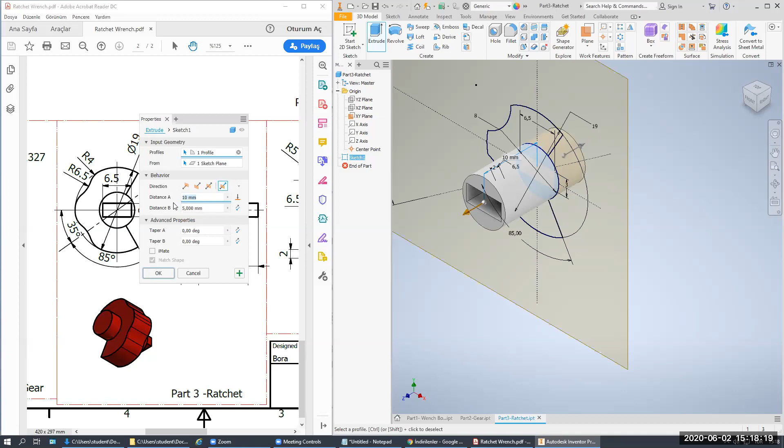I have the extrude tool. I will use this section to go inside or outside, or with an asymmetrical view here. Here we have 11.2 millimeters. This time I will use this section, as you see here. Also, I would like to keep the inside, I have this one because I need that section as well.

Also, for the other side, we have a 4 millimeter thickness, which is this one. I have the first figure. To use this one, I will just make it visible. I have the extrude tool this time. I will use this extrusion to be 7.2 millimeters in thickness. As you see, we have 4 millimeter left for the 4 millimeter portion of this part on the other side.

For this one, I need a sectional rectangular section on the top side. For this, I need to start a new sketch.

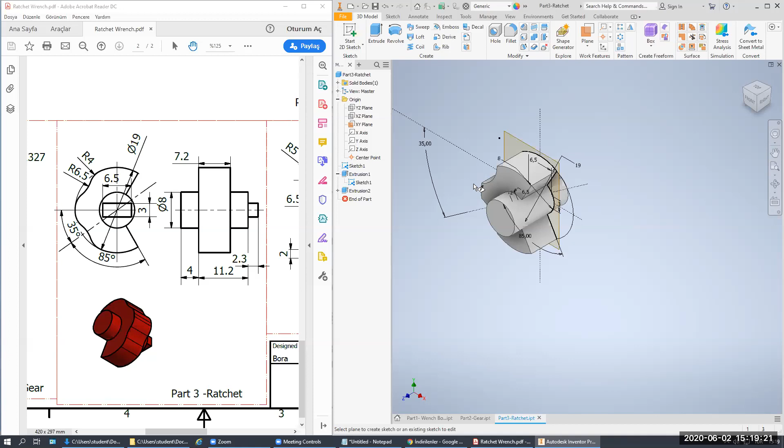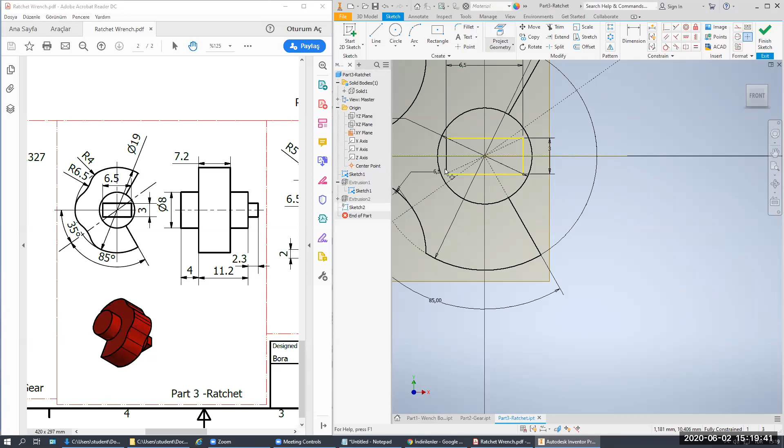This time I will just hide my body part and grab the geometry with the project geometry tool, which is seen here. Okay, I have forgotten one line. You can also use that line by connecting the line portion of that side.

I will use the visibility tool, have the extrusion tool. This time I have a 2.3 millimeter thickness on the top side.

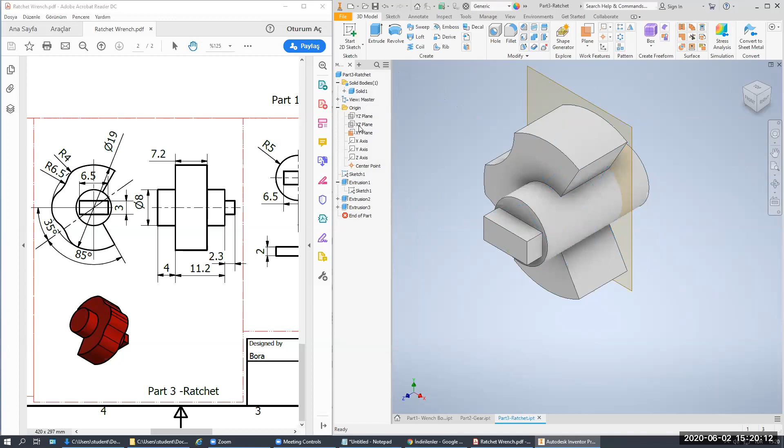Okay, what I need is here. I will just hide the shape sketched, and I would like to have visibility, the same ratchet part as usual.

The next portion we have the standard millimetric part. For this cover part, I'm going to just design, say the part 5 lever.

This is a very easy part. Creating a sketch on the XY plane. For this, I need sometimes a little axis line. We have two curves here.

One bigger curve, one smaller curve, and these curves, the arc shapes, are connected with two lines. So here I will just make an arc shape and trim the unnecessary parts.

For this one, I need a new rectangle to inside. I will just give the dimension as I have seen in the technical drawing.

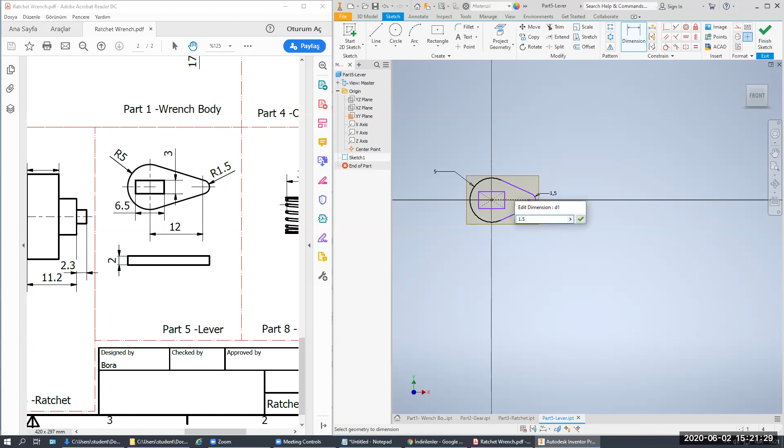We have 1.5 to this side. We have the axis distance, which is 12. We have the rectangle dimensions, which is 6.5. It is 6.5, with a 3 millimeter thickness.

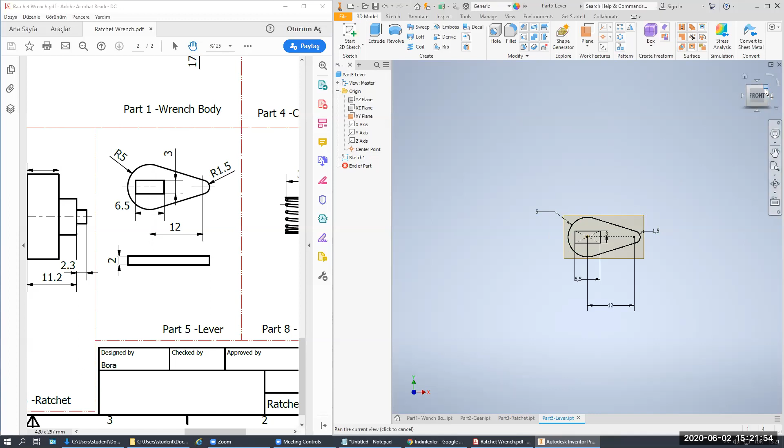Okay, finished my sketch. I have a 2 millimeter thickness sideways. For here, I will just change my view. You can just keep it as the mid plane if you want. For this, you have to use the symmetrical extrusion tool. I will change the distance, let's say, and make it again.

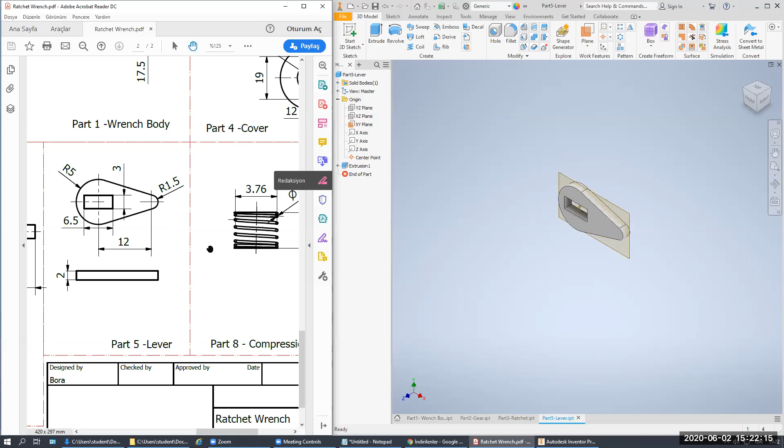The next part we have is the cover part. Again, it's on the XY plane. I will use visibility, it's the XY plane again, the same thing.

This time I will just create an axis line and choose this point, the point which is at this center origin point, which I have seen here. I'll create a base, a new line.

I will just convert these two lines to construction, make this line pass through the origin point, and make a new point coincident with the origin point.

We have a line for holes. Also make this line midpoint coincident to this line. This is also a construction line.

We have a thickness here, which is 19, and we have a distance of 12. As you see, we also have two circles connected with two lines.

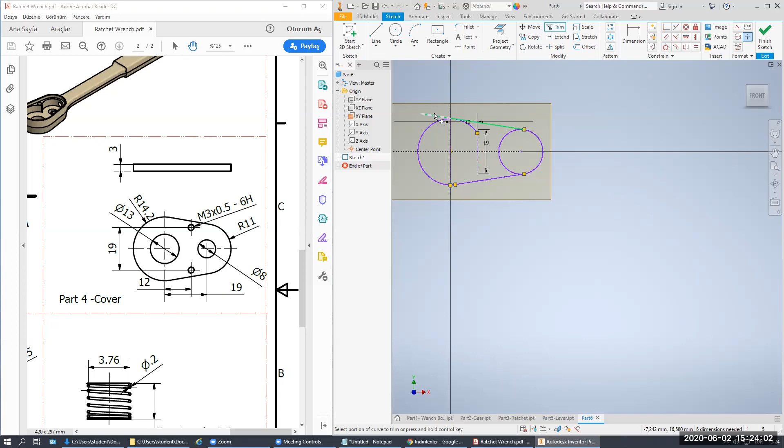I will use two line tools, and I will make the two tangents between these two circles, make the trims, and fill up unwanted parts. I will just make the trims as much as I can. Okay, here we go.

Here, three circles to see. If you want, you can also use the circles for purposes. We have 18, I'm sorry. I haven't fixed this line, so that's more like that. We have again the line between these two points, it is 19 also.

This point, this line, which is 19, and we have a dimension for 8 millimeter, which you have seen here. We have another point which is 14 here. We have a dimension with a radius 14.2 here. We have a dimension here which is 11.

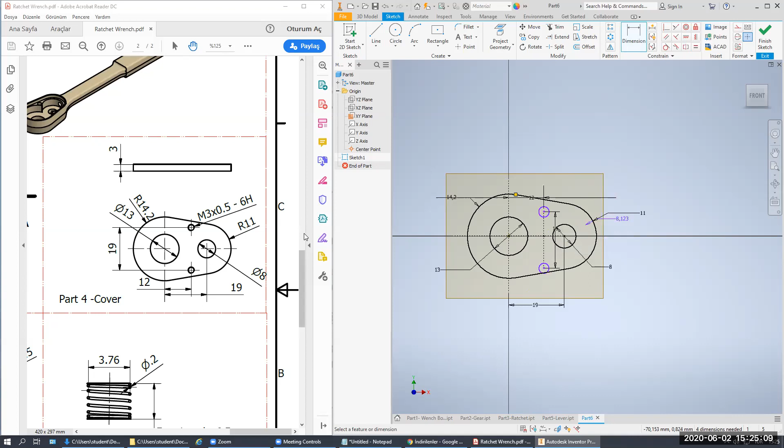As you see, dimension here we have 19, and this is moving actually. To prevent this one, we have a line with 19 millimeter and make this line midpoint coincident of this line.

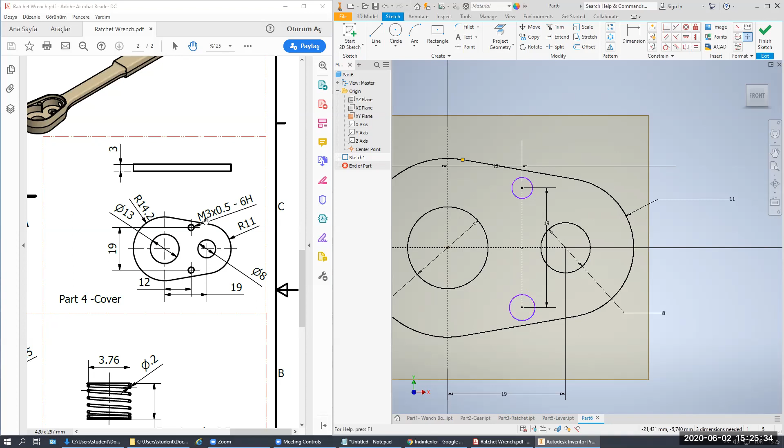To prevent this dimension, I'm not going to use these holes because I will use a hole tool with a full thread feature. I will just finish my sketch. I have a 3 millimeter in thickness.

I will also use these two circles because I will just make these circles with a hole tool. Fill it with 3 millimeters. You can just use this time to have the hole feature, to see this tools, to see the sketch points for making the hole purposes.

I will just make my extrusion to one direction and the inside of our XY plane till to the back side, or the back, not the front side, to the back side of our part here from this view.

Here, what I'm going to do is I will just create two holes on these two points, and this will be a threaded hole with a normal, without a counterbore, spot face or countersink options. I will use my metric profile because we have a metric tool here, and our metric size thread is 3 millimeters with a through all distance, so properties, with a full depth property for the threaded section.

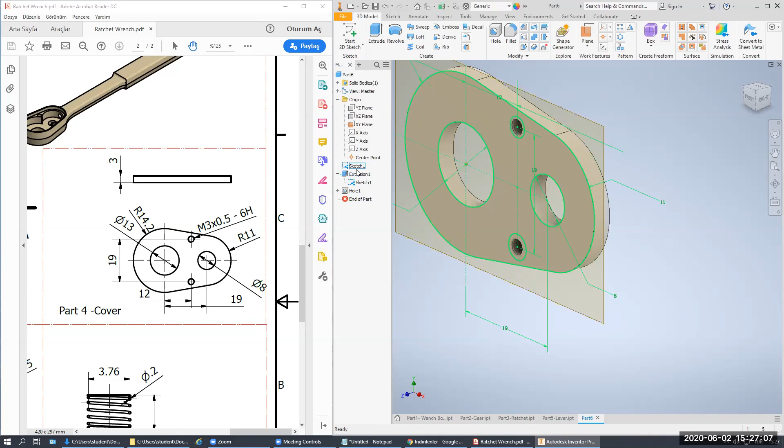As you see, I will just close the visibilities of our figure. I will just save my part file, which is 4 with a cover.

Next thing, we have a compression spring. So, a new standard part. The drawing length, it is given as 3.2 millimeters. The free length is 6.5 millimeters, which tells you that we are going to just model the drawing of our part with a free length.

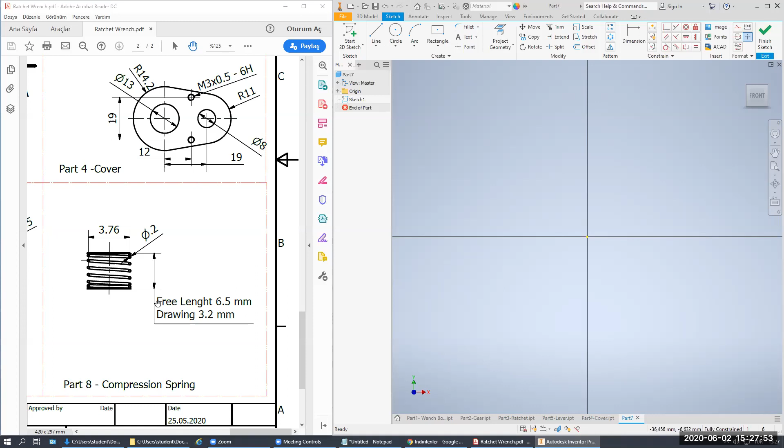In the drawing, we are going to make a 3.2 millimeters. We have a coil sizes, and I will just make the counts of these coils: 1, 2, 3, 4, 5, 6, and 2 half on each side. I will just make a spring here, the wire diameter.

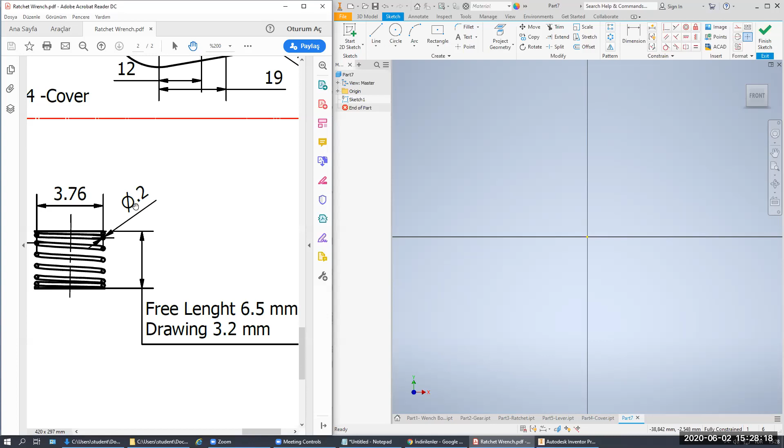The wire diameter is 0.2 millimeters, and the axis line is here. I will start from this point, the free length. This is my origin point, and I will just like to keep the center line.

Properties this line. We have a coil profile, which is this one. It is... sorry, I will just enter 3.76 millimeters, I'm going to use.

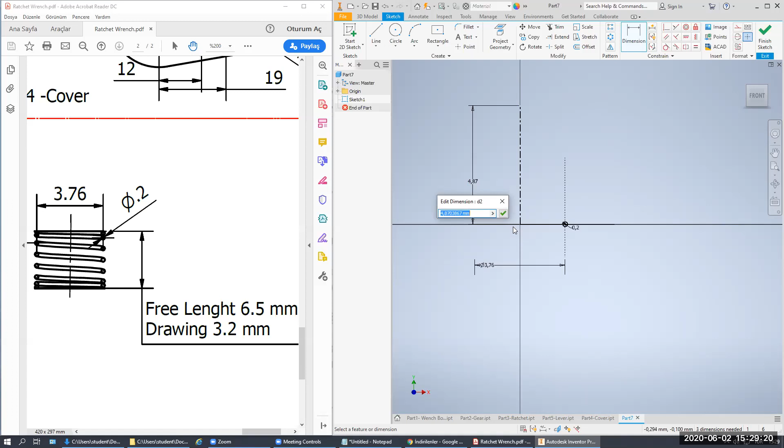This is my construction line. I will use this intersection point, which is my wire diameter, is 0.2 millimeters. I have many coils so far. I have just counted with 7 coils, and the free length, the dimensional length of here is 3.2 millimeters. Here, finish my sketch.

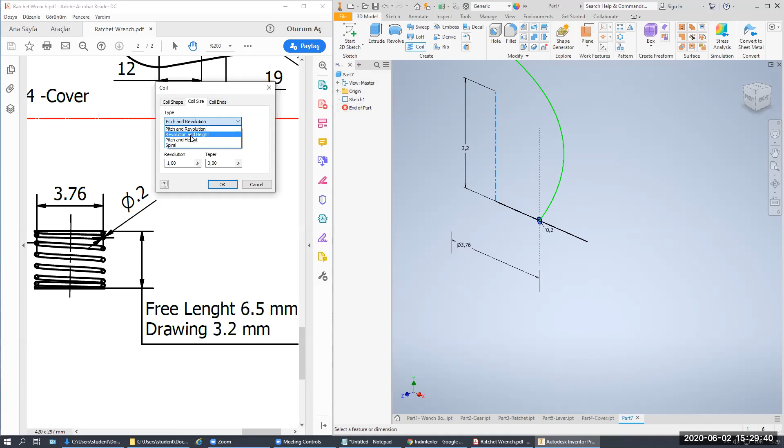If you want, you can also just use the coil tool as you wish. You can just use this axis. We have a profile, the coil size. We have many options here. The revolve, you can have 7 or 6.

I will just use the plane tools. I will just create another plane from this point, which is 3.2 millimeters, and I will make the split.

This time I will split, trim the solid by using this split tool. I will use this tool to keep this side. I'm sorry, just use edit feature, change the removal side.

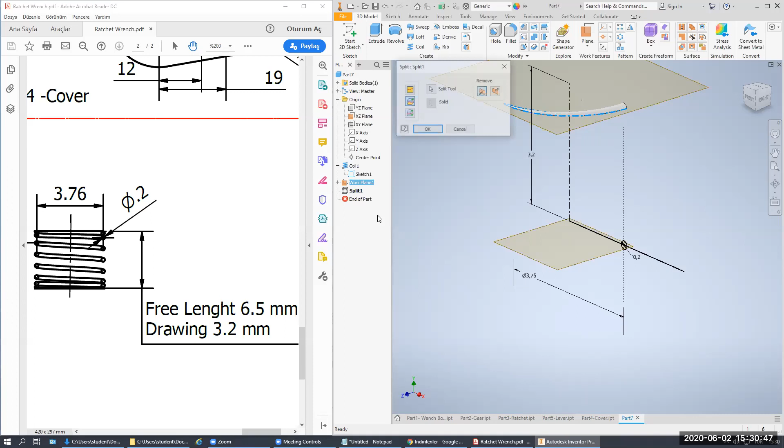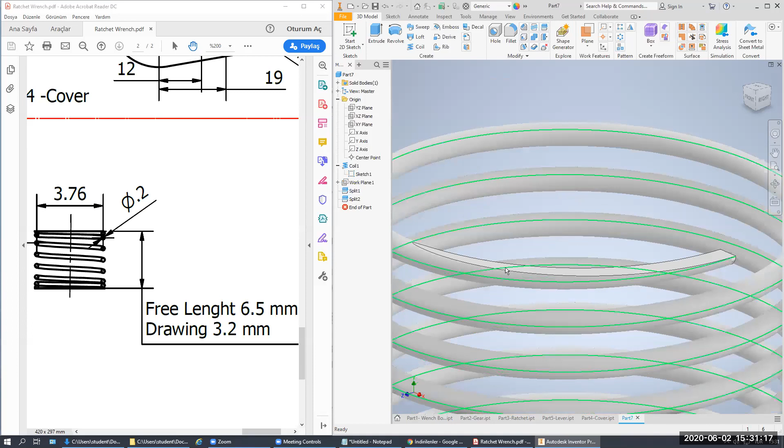I will just create and hide the visibilities of our plane. First thing, in the future, I will need some flat surfaces for mounting purposes, and also I need an axis made the mating condition of our axis.

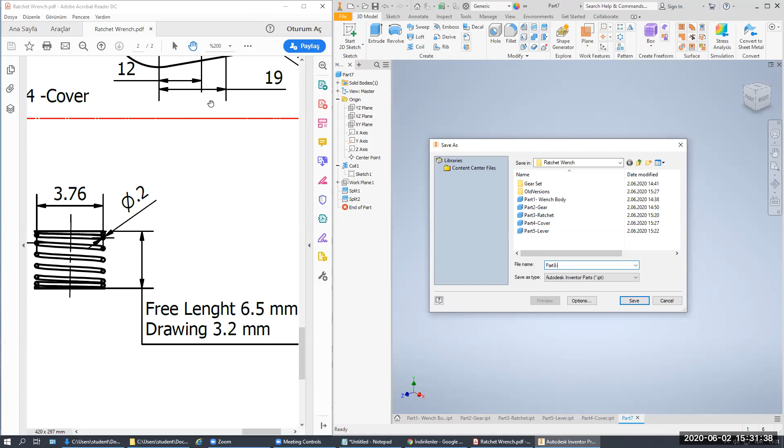For this reason, I will just open the y-axis only for mating purposes. I will just save my part with 7, 8, I'm sorry. This is my 8-part compression spring.

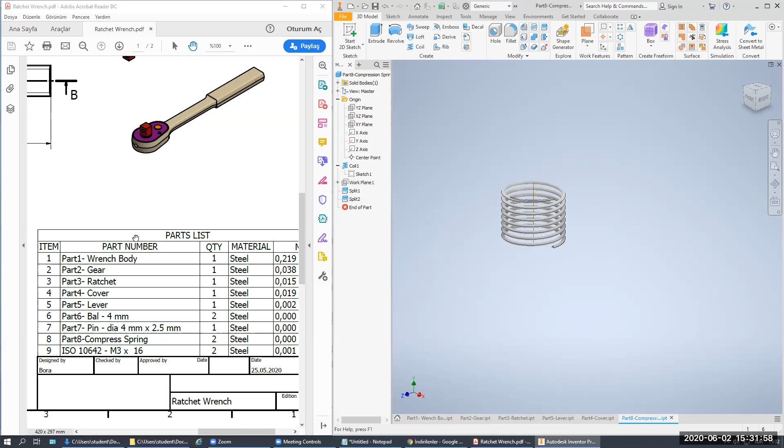I need two more parts that I previously mentioned: the ball and the pin diameters. The ball is part 6. I will just create a new part file and change the name of our part 6.

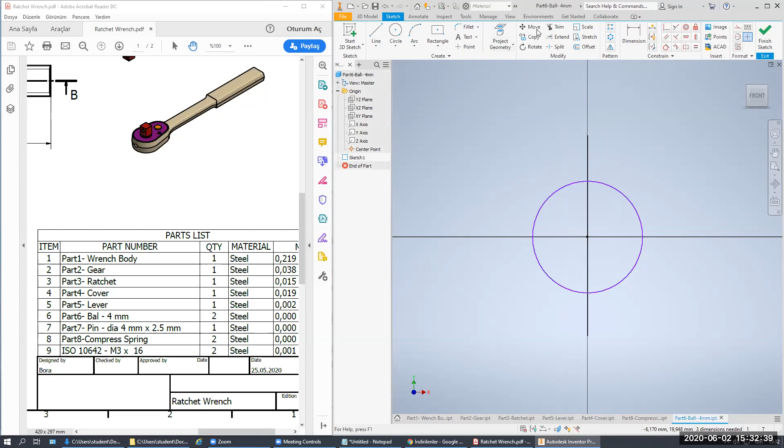This will be the ball, 4 millimeter diameter. For this, I will just use the visibility settings in the sketch on this plane. I will create a new circle, make a line which will pass through the origin point, trim it, and dimension the diameter at 4 millimeters.

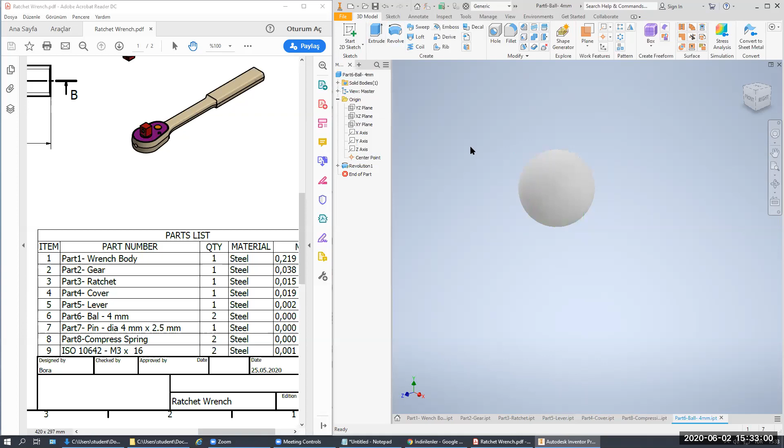I will use this cross profile to be revolved around this axis, getting a ball at this point. Save, and change the material to steel.

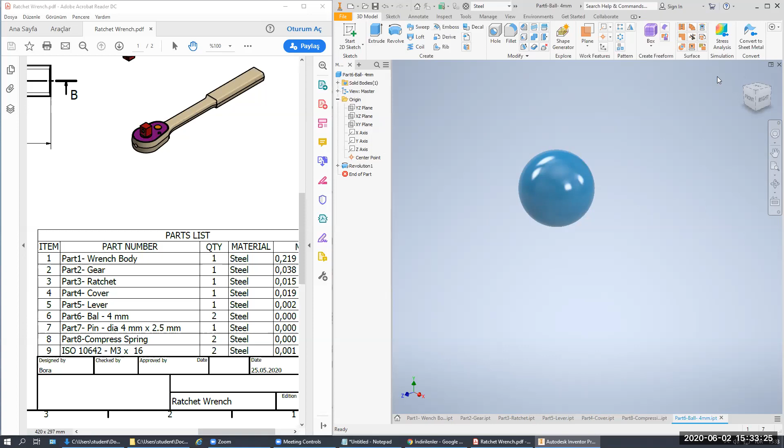You can use the tool for appearance, any color if you want. So what I need next, I will save this part file.

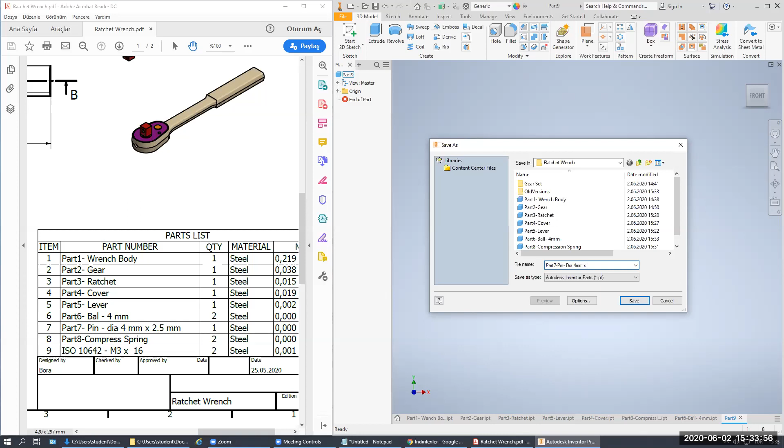The next part we have is a pin, and we are going to make the assembly in the second section. This is part 8 - I'm sorry, part 7, the pin, with diameter 4 millimeter by 2.5 millimeter.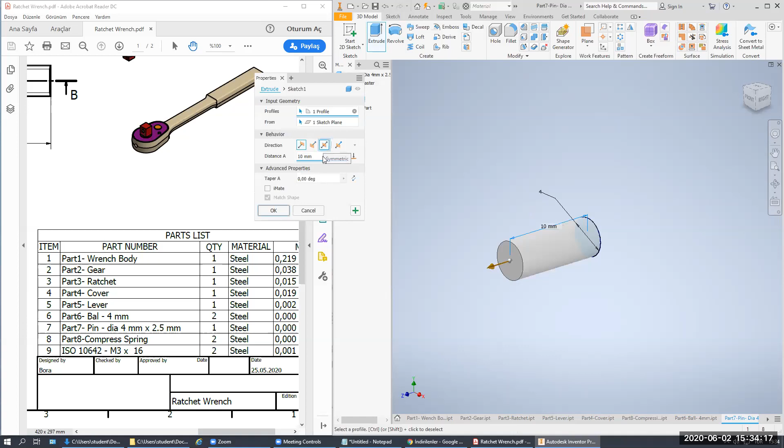I will use the sketch tool. This is a very easy part, so I'm not going to work on the axis properties or other things. What I need is 4 millimeter diameter here, extruded, keeping the XY plane for symmetry purposes.

The dimension here is 2.5, which I may need for sectional purposes. This is also a steel part, so I will change the name and the material to steel.

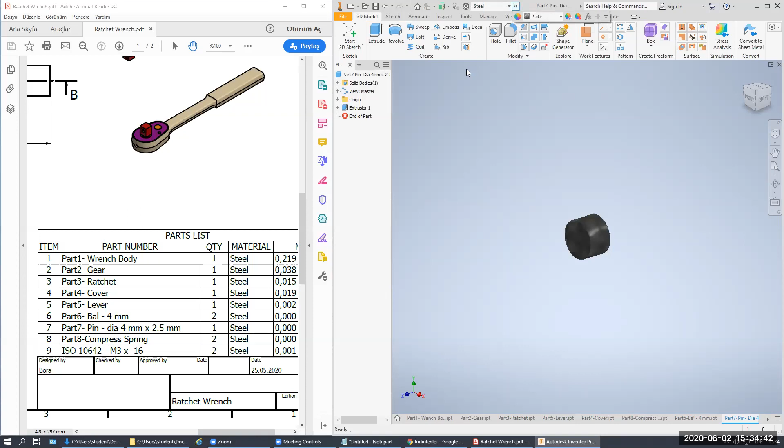We can also change the appearance. From the appearance tool, we just set the properties. I have saved and completed all the files.

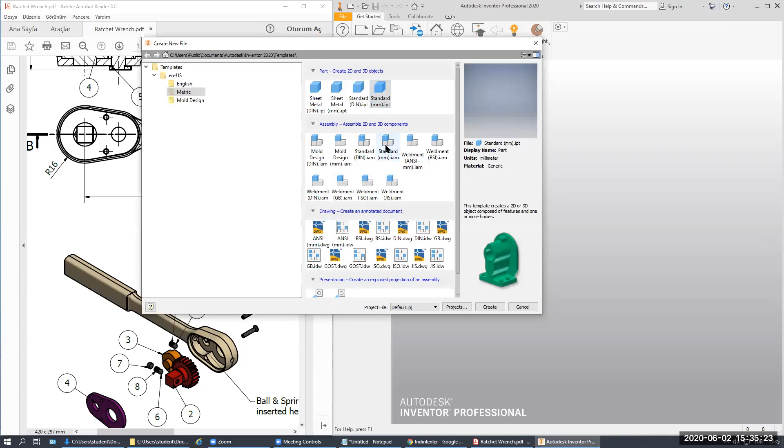We can now move to the assembly mounting. It's a very easy assembly, but for the pin, ball, and spring constraint mountings, we will make the groups one by one. I will open a standard millimetric assembly file and save it as ratchet wrench.

From the place menu, I will bring in all the parts that I have created so far. The first part I bring is the body part, and I will make it grounded. This is very important, otherwise you can just change the part visibilities.

I will use the view tool with shaded with edges to see the sharp edges of the connections. For the appearance tool, I will close the origin's extra visibilities. Then I'll save all the files here.

I will change the appearance to, let's say, magenta - I'm sorry, cyan. Yes, this is the appearance for cyan.

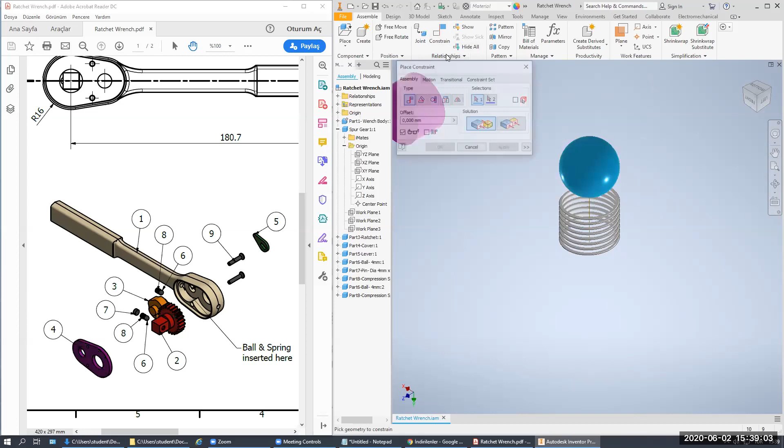You can also create a tangent condition to this part, to inside or outside. You will just see that as it is, so it is tangent to it. You can also just copy this one as well for the other side.

Okay, I will ignore this one and just mount it on the gear set. You can also use this. I will use the constraint tool, have this axis to inside, and take it out from this part.

Here, what I'm going to do is I will use this axis for mounting this time. As you see, we have it out here. Okay, next thing, what we have here is I will just keep it grounded for mounting purposes only.

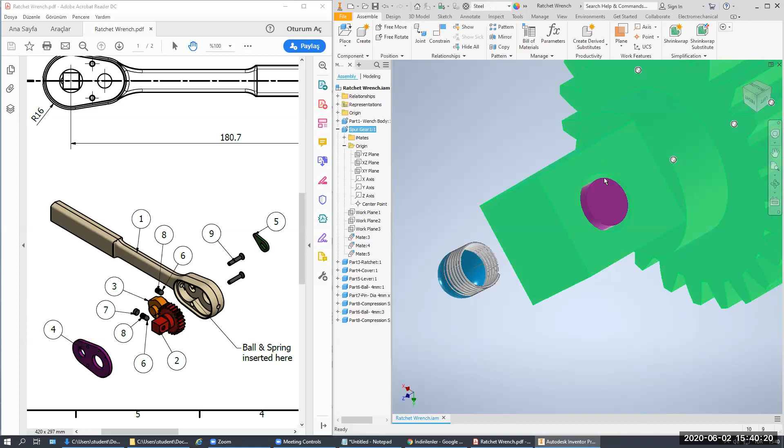I will use this part, also this pin, to this side. Okay, next thing, mounting. This is the part for here.

I think I have a mistake. And I will use this one.

For this, I will use the angle tool again. For this purpose, I will use the angle, surface, this edge. Just this one.

Also, we have some dimensional tools on the other side, so we can just create one. I will just define the XZ plane.

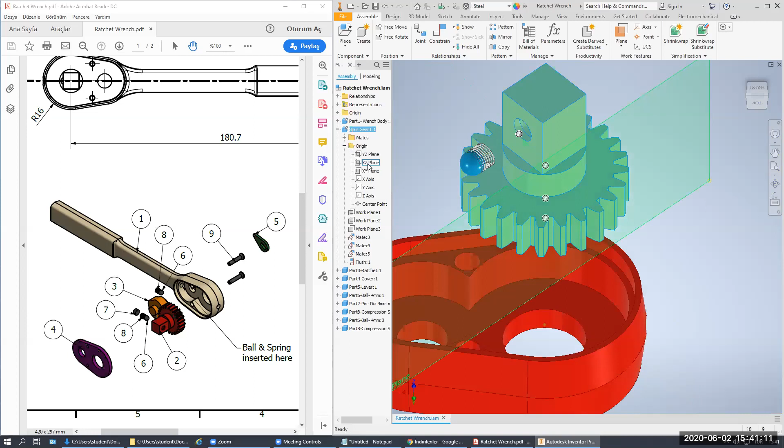Scroll here, plane, which is basically this one. This one actually is better to use for a half section view. As you see, we have the half section view.

I will just make a mount on the back side of our feature. I will just make a constraint to this one. I will change the dimension tool here.

This is 5mm because I'm just going to change those. Open the part. First of all, I'm going to change the diameter, then the dimension. Finally, I'm sorry, first I'm going to change the dimension.

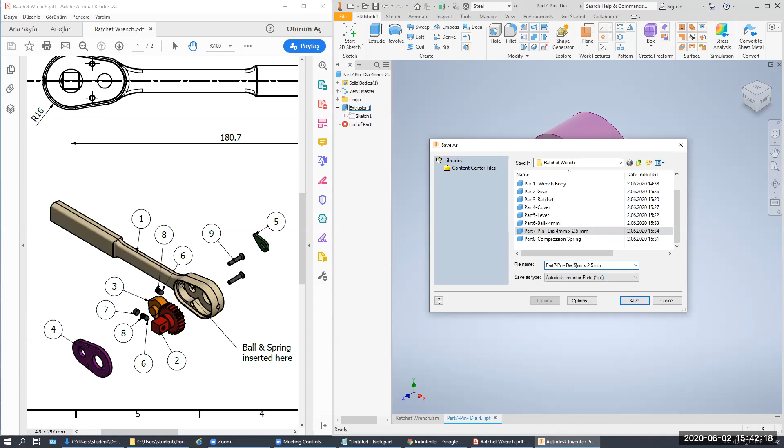Then the file name, save as pin dia. This time it is not 4, it is 5 to 2.5. I will change this one. Also, this one I will just close.

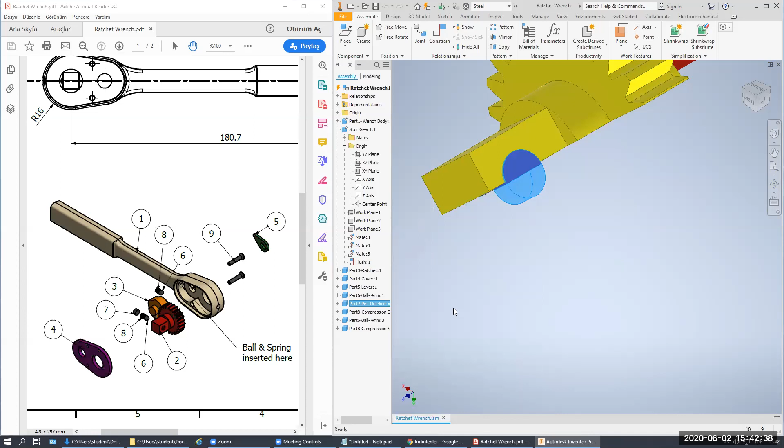Yes, as you see, it is changing, but I will just replace this component on the folder which I'm working in. I will change the font to a different one.

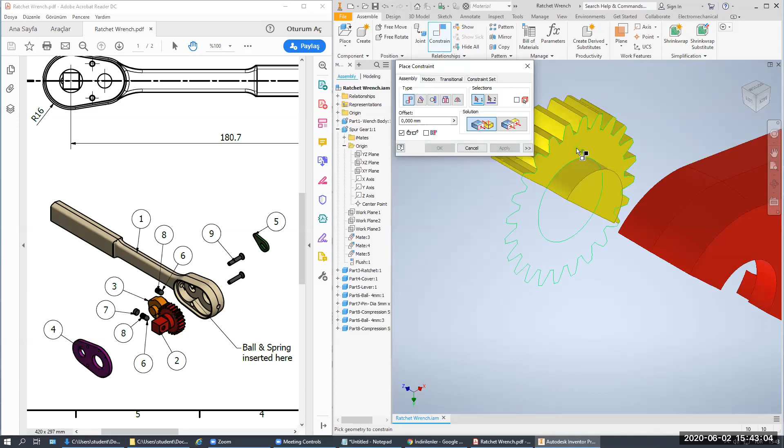I just made a mistake. And in the usual style, I will just keep the bottom face of this gear sit on this body part. I will make a constraint, use this face for mounting on the other face around.

And I will just type the key. Yes, actually I have grounded it for mounting purposes. For this, again, made the against condition, the mate condition. I'll just keep this one.

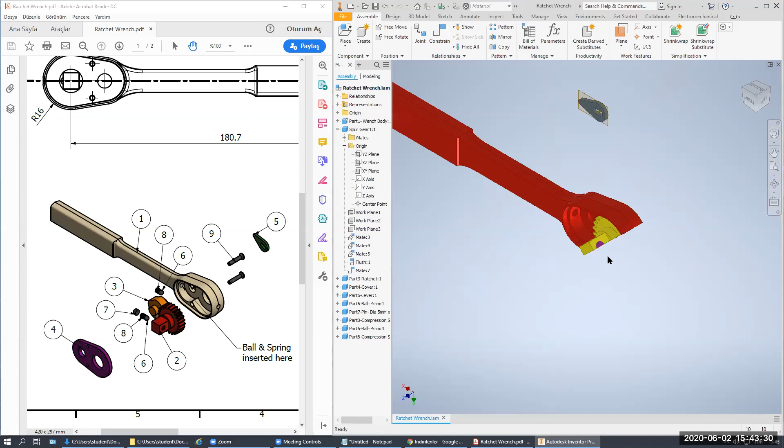As you see here, they have been turned together with all the parts here. Just the next part, we have a ratchet part. I have a constraint this axis to this axis, as you see here, and I will make this part on this side.

So the other side as well. Start the ball and the spring condition just works on this side.

I will just make a sectional cut up to this point. As you see, I will just make a half section cut here, a little bit inside, at this point here, to show you better.

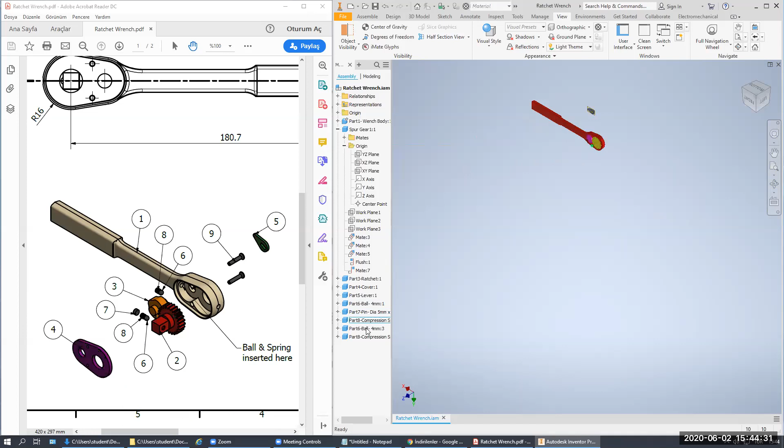I'm sorry, I made a mistake. In section, first of all, I will just create an axis made with the...

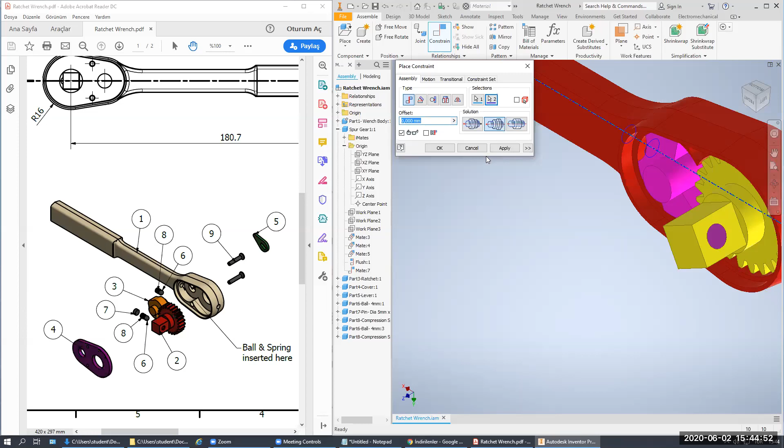Let's use this time again, the view with our section here inside. See what I'm doing here.

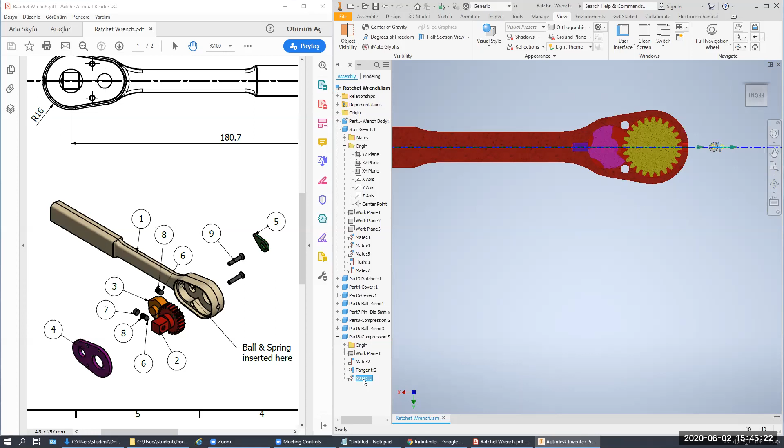You see, the spring is on the other part, the ball part is on this point. The direction is different. I have just used this compression spring made here, as you see. This time I will edit this one.

This is the align, this is the opposed. I will change this dimension to this side. Here, what I need is, if this is the open one, we have a spring loader, and this time when I use it...

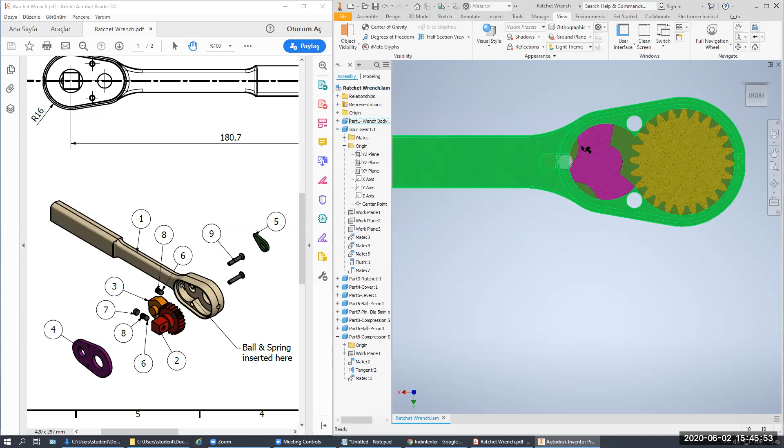This time, when the spring loaded just stops this one, it stops the ratchet down. When we have pushed one around, it will just push this spring and the ball inside.

We have a locking block about this one. We have the lever inside on the back side of our wrench body, and this is spring loaded.

What I need is I will just make this one tangent, deleted, and take it out here. As you see, we have just made the spring at this point, at this point.

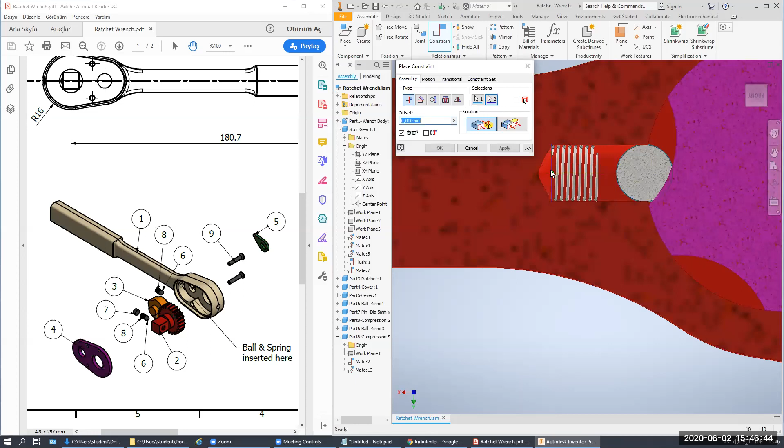Yes, we can change this one, this stuff. So we have a tangent condition, which is this one.

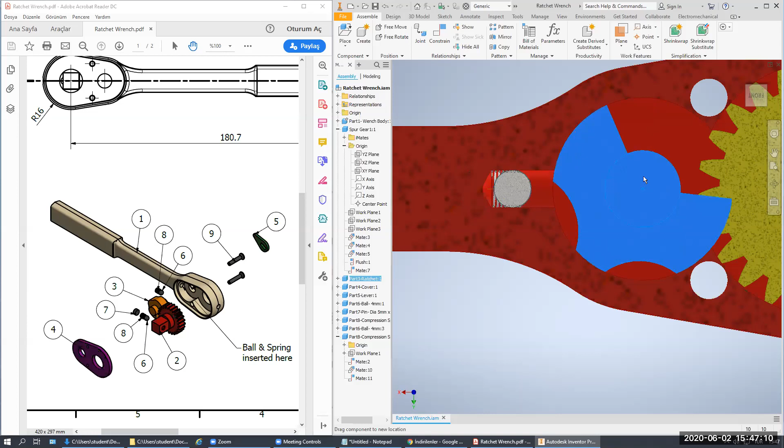Just make it constraint, touch the face with the angle condition. This face is to be angle with this face.

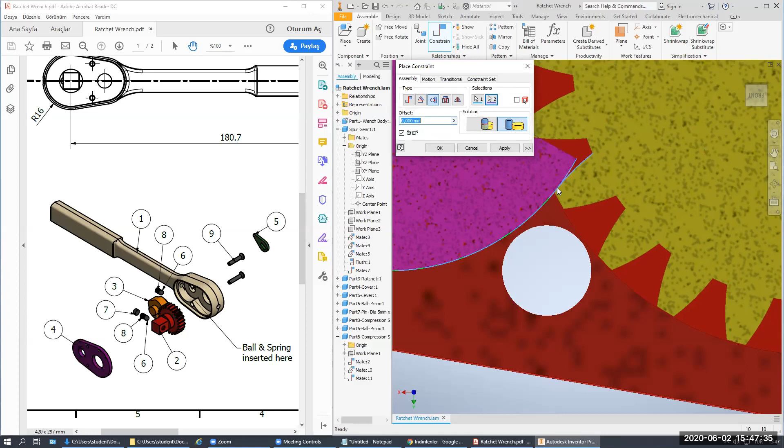Next thing, we have a ratchet on the other side. I have the whole section with a half section view. I will just cover, put the cover on the back side.

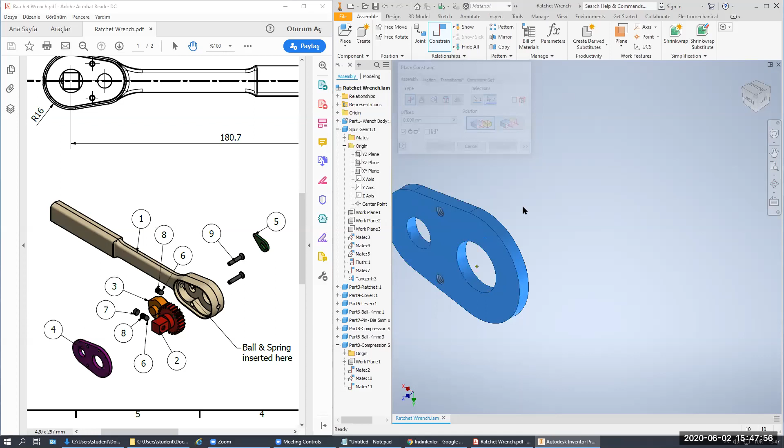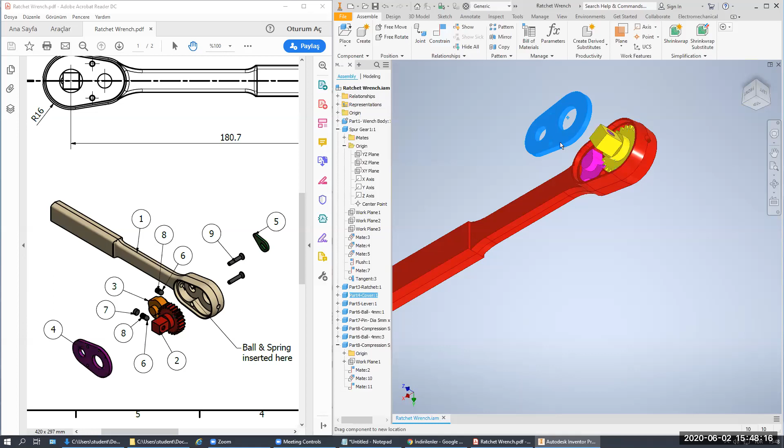I have a seat at this point on this face together. Here, what I have is this one. Again, this face is on the back side of our face here, as you see.

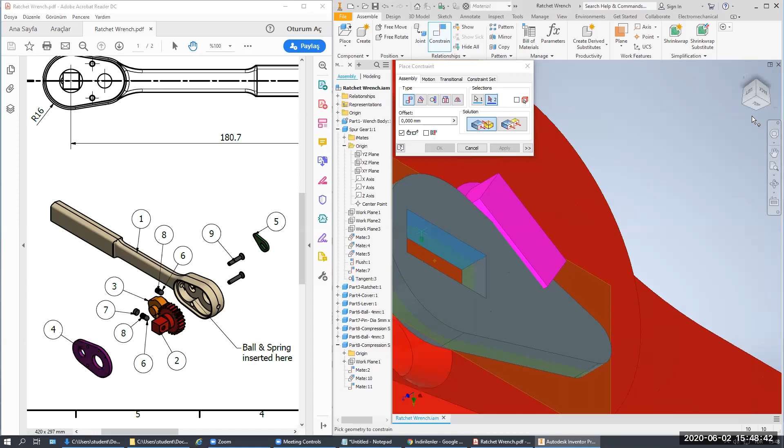I will just make the back side of our part from this face to the back side of our face. What I do is I just make this one here. Yes, this is the part that I have modeled so far.

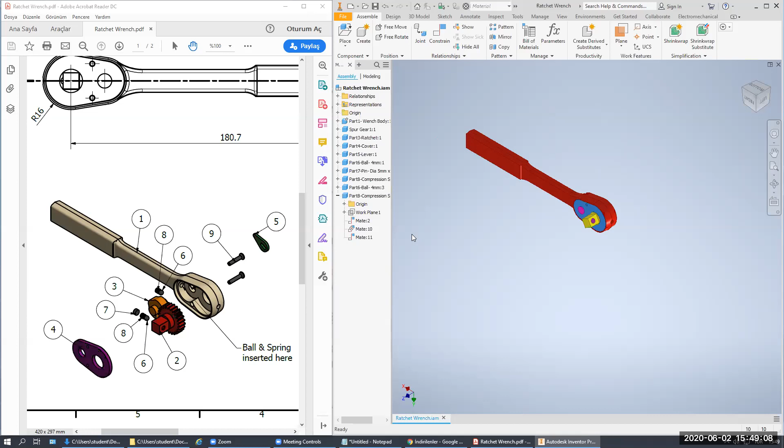Let's save it. Now I can use my parts. In line part, I will use the library to Place from Content Center we have two parts. And from the fastener feature, you can also use the search tool with the standard number.

I'm just going to search 10,642. I'll use this tool, 10,642. This is the part number. You can use both of them.

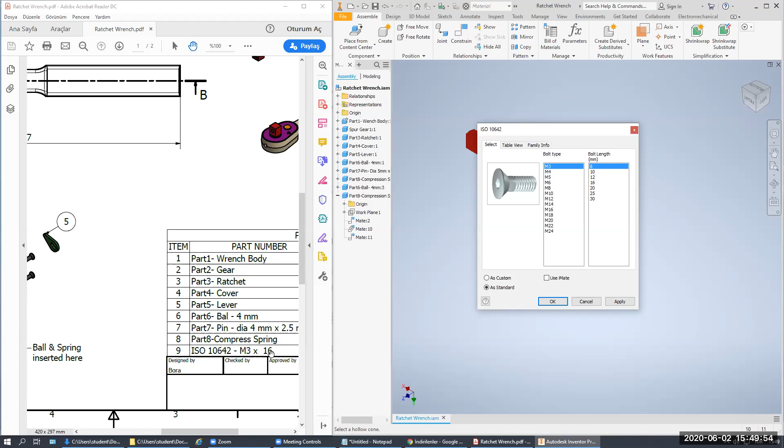I will use this one and change the size to metric 3 millimeter and with a 16 millimeter in length. I will use two of it and make mount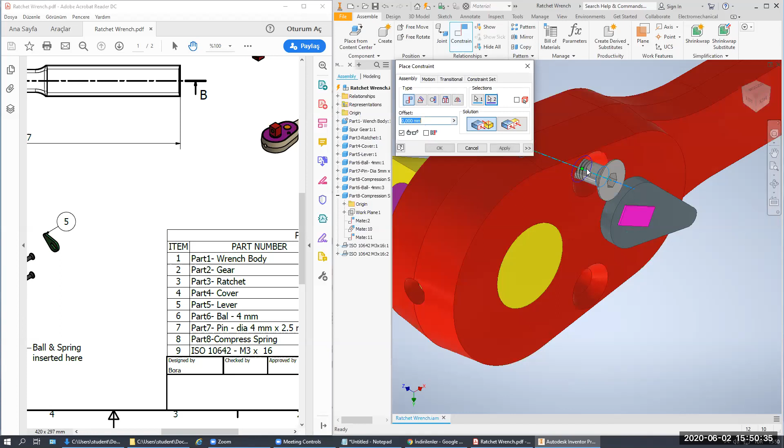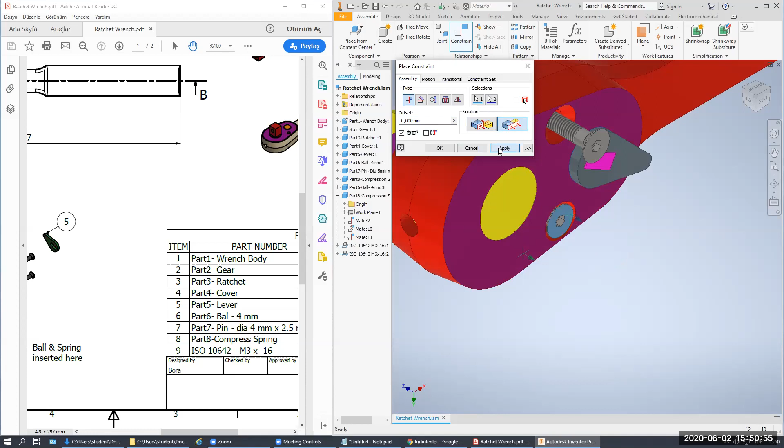Surface to surface. I'm going to use this for making this assembly condition. This face needs to be aligned on this face. Also, this face and this face want to be aligned again.

This is the assembly for the part. We also have an exploded view. As you see here, what I'm going to do is I will just put a new exploded view

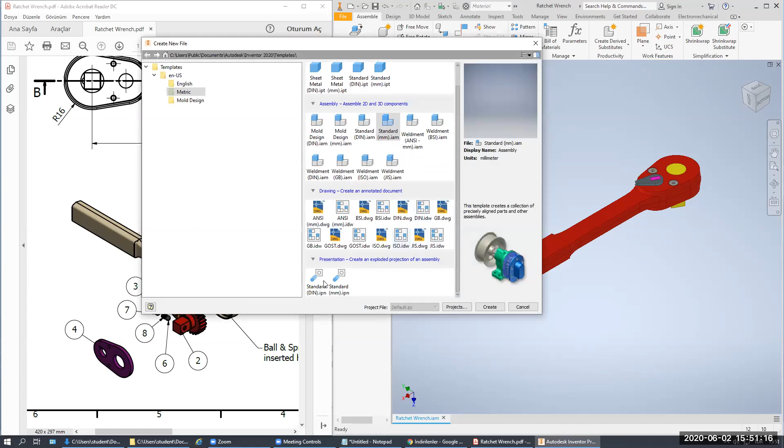with Standard (mm).ipn. I will use the part of our ratchet wrench. And from here, what I'm going to do is I will just tweak the components.

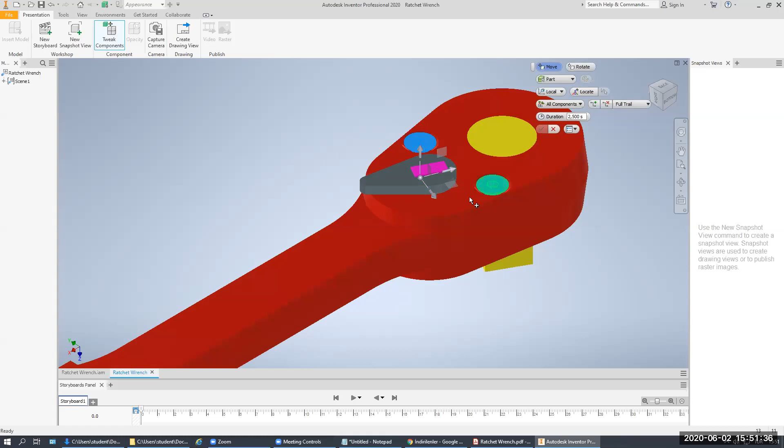First, I should use these two items to be taken out from our assembly to open the cover of our part. For this, I have a storyboard, as you see.

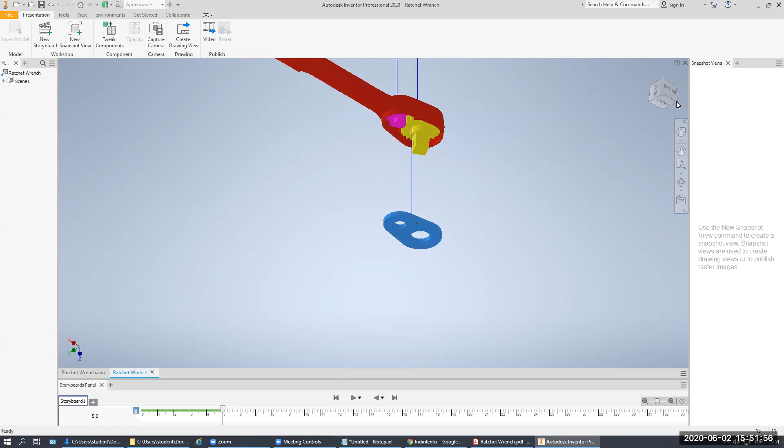When I take the cover around, I will also take this one, or I will use this one. Also, I can just freely take everything, the ratchet and the other components together from outside.

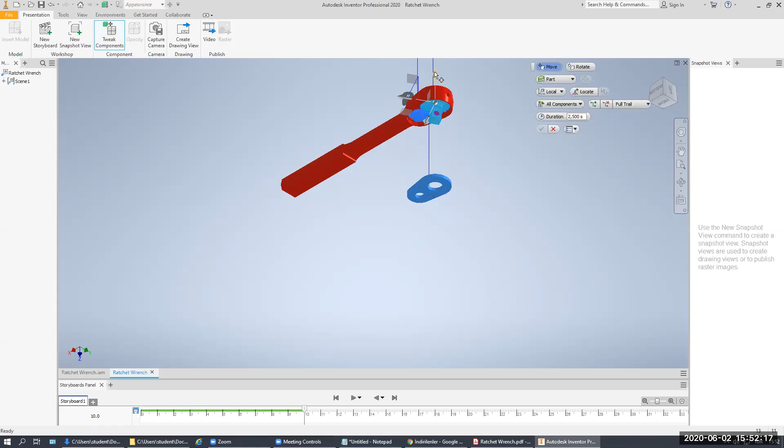Also, I can take - I have just forgotten these two parts. I am very sorry about this issue. I will select two parts and deselect. I will select two parts and deselect this part.

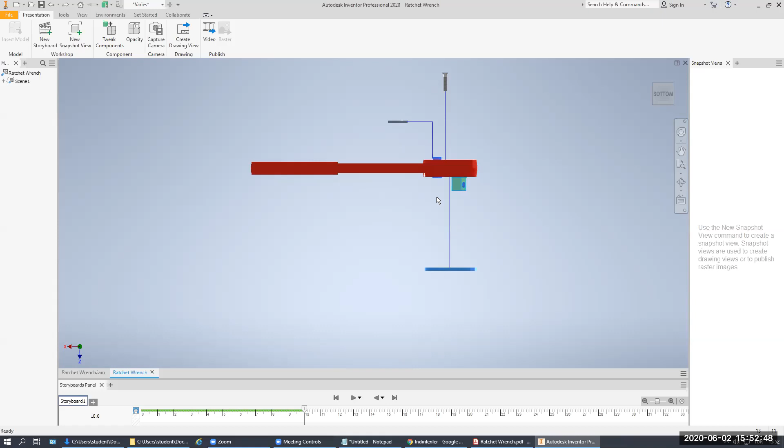I will use the control button to select and deselect three components from these points and body parts. As you see, we have a pin outside. I will just take this pin.

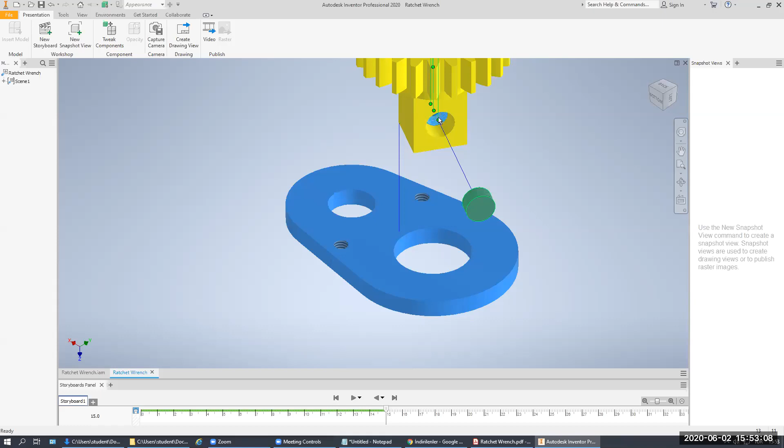As you see, I will use the principal axis. After taking out this pin, I can just freely take out the ball and this pin outside.

The parts that I'm responsible for about this one, I have decided what I'm going to do is I will just create everything inside two components.

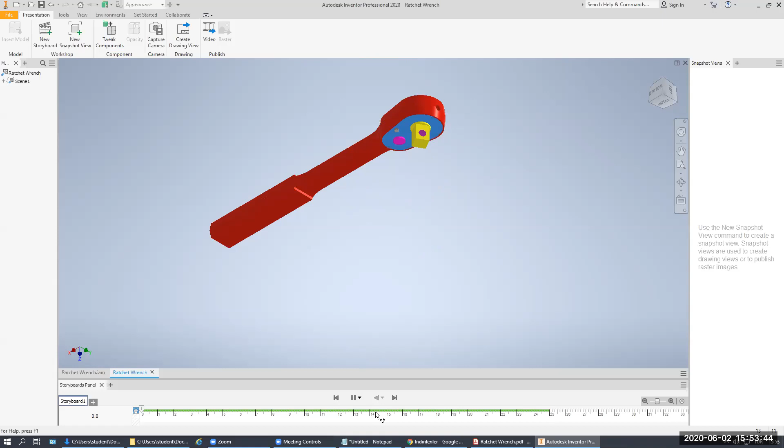I will just take this out of the movie to show you, to show someone how we are going to make the assemble and disassemble of our project.

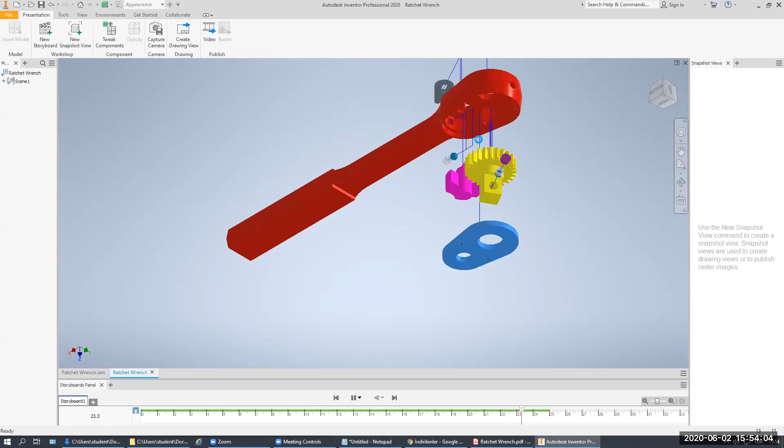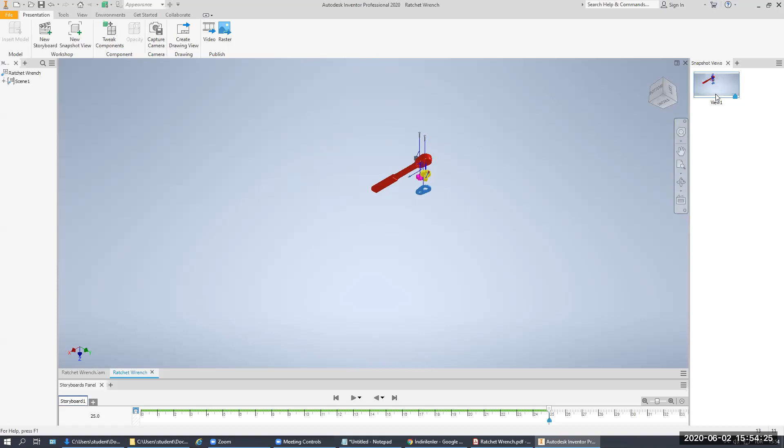This to use in the assembly drawing here. I need to create a view here. I will just right click, delete the zoom out option. One view will be enough for the section.

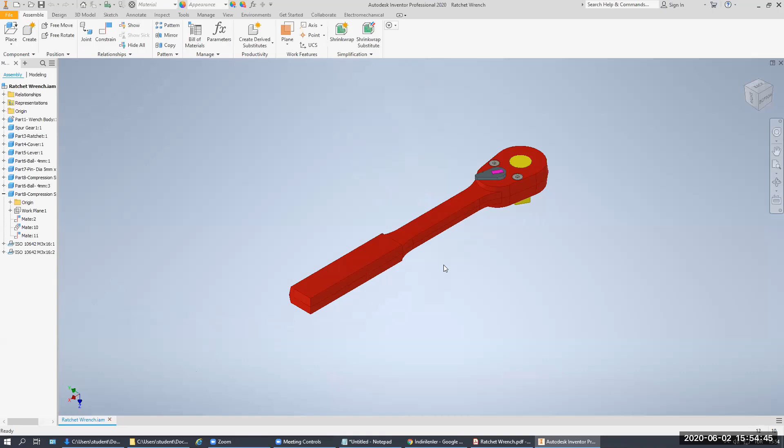I will save my part file, Ratchet Wrench. Yes, this is the body part. What I'm going to do is I will just continue with the technical drawing part later in another video.